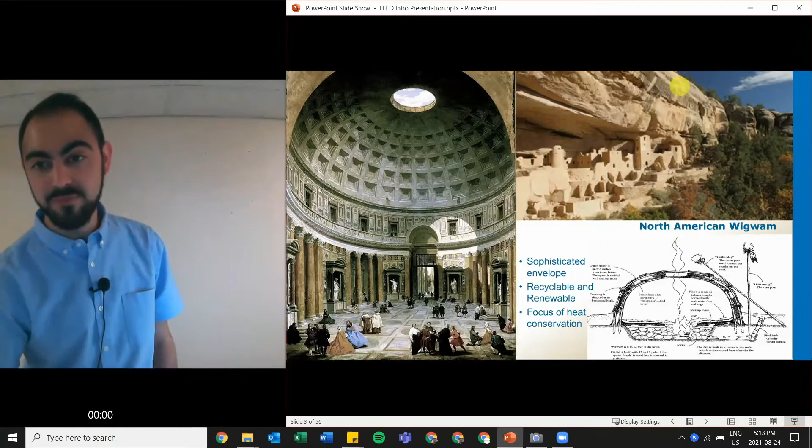So what I'm trying to get at here is, buildings aren't new - we've been building buildings for thousands of years. And if we could take some of the techniques we used to build, or variations of them, and incorporate them into our buildings today, we might be a lot more efficient than we knew we could be, just by using techniques that have worked in the past.

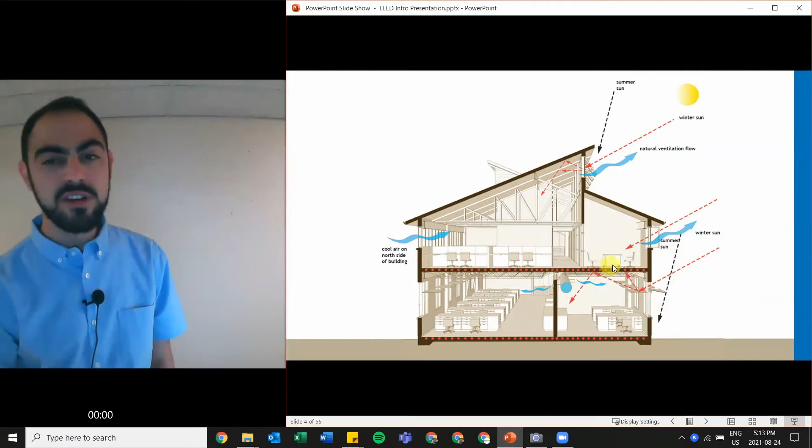And this is the modern way of looking at solar or passive heating and cooling - blocking the unwanted heat from the high-angled summer sun, but giving me free heat from the low-angled winter sun when we do want it, in our south-facing windows. So really, why are we here today?

I'm not going to explain too much about global warming and carbon emissions. We understand the connection - never have we had more carbon in our atmosphere than today, and that is a result of how we power our daily lives through fossil fuels. We know that carbon is able to trap extra heat in our atmosphere and increase our temperature by a little too much, and it's going to have a lot of effects, and it already has had some.

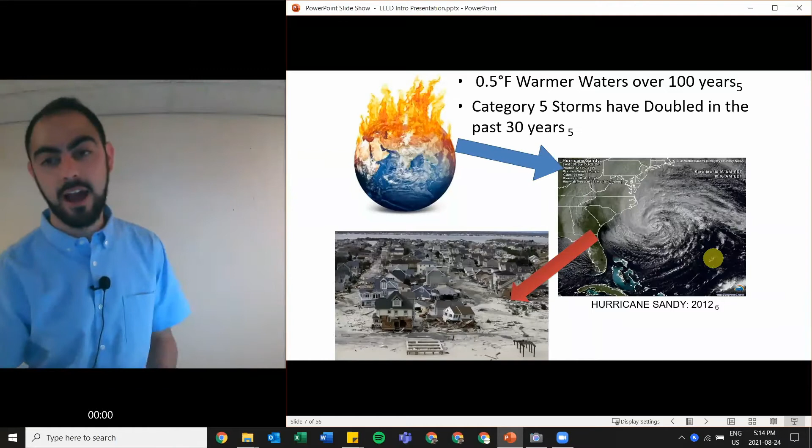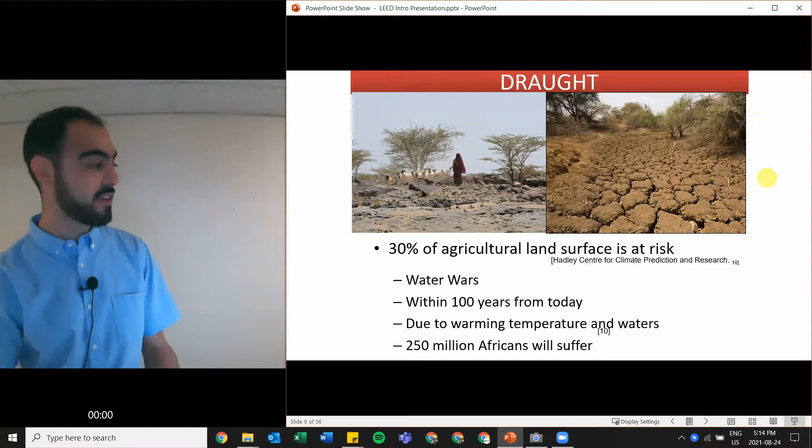We're looking at not only the air warming, but also our waters warming, and we're seeing more and more vicious hurricanes, which warm water is a breeding ground for. You can barely calculate how much damage, in terms of lives and money, things like this have caused. We're looking at unprecedented levels of drought throughout Africa, and now in North America - we saw that in the US, a lot of their lakes are below points that have ever been seen before - and just general pollution.

To be honest, if we don't make any big changes right now, we're going down the wrong path. And there's a lot of people out there that don't believe that science, and I say to them, okay fine, let me frame it in a different way. Right now, we're on Earth - it's the only planet we're living on.

There's a finite amount of resources on it, and we've been lucky enough that the Earth is willing to share them with us, but it simply doesn't make sense to use them at the rate we're using them. Whether you talk in a climate change sense or just common sense, it's not economical.

Our population is rising, and our demand for energy is only going up faster and faster. If we keep our consumption rate at this level, we're just not going to be able to afford our sources of energy. It's not efficient, and it's short-sighted - our consumption rate is too high for our energy resources, and we need to find alternatives that are less harmful as well.

So there's this word sustainability. It is the buzzword of the last decade, that's for sure. Everybody claims themselves to be sustainable, and this is one that actually is a direct sustainable profession, and I'm happy that you're interested in it.

Now, there's a lot of different definitions, but the one that I like to get you in a good frame of mind is the fact that we don't inherit our Earth from our ancestors, but we rather borrow it from our children. And that plays on the actual definition of using enough of Earth's resources to support ourselves without compromising future generations to support themselves. And that's what we're here about, mainly pertaining to buildings.

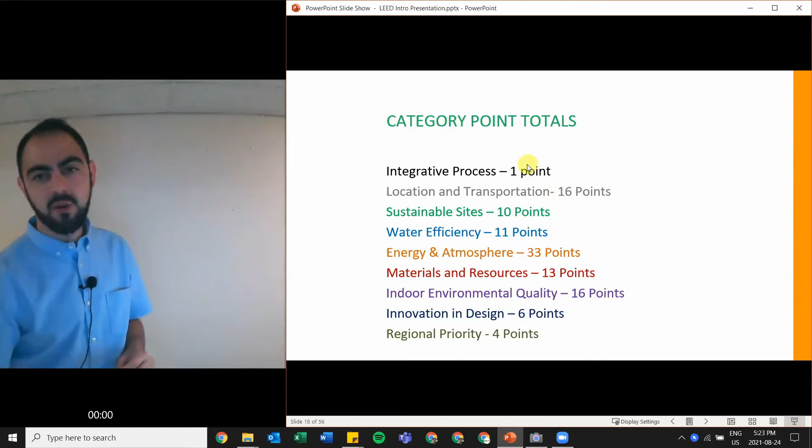This is a little scorecard that we go into detail in the course, just breaking down all the point totals per credit per category. Now, these are the categories, and we're going to just touch on them a little bit, but I just wanted to introduce you to them because eventually they will be somewhere in your brain. Here are all the categories tallying up to 110 points total.

Now, the reason why LEED has really been so successful, and you've probably heard about it before I brought it up or Ashton's brought it up to you, they've done a fantastic job showing developers and owners that going green doesn't have to mean cash money green. A lot of the times I've seen a LEED building not cost anything more, no premium over a conventionally designed building. However, usually it's about a 1 to 3 or 4% premium on the initial cost of a building. 1 to 4, that's nothing.

Well, on a $100 million building, 1 to 4 million bucks is still something to most people. And that has been a challenge on encouraging people to kind of make the jump into LEED. However, once they see the high return on the investment, it's a much easier sell.

And there's 2 different ways to return your investment. The indirect ways are marketability. So we look at a lot of universities, colleges, businesses like banks, only building, buying, and leasing out LEED certified space. Why? Well, looking in 2021 and on, sustainability in our decision makings as a customer has only become more important. And if our sustainable values align, maybe I'll come to college, university with you. Maybe I'll do business with you if our environmental values align. And that's the indirect way, increasing our corporate sustainable or social responsibility.

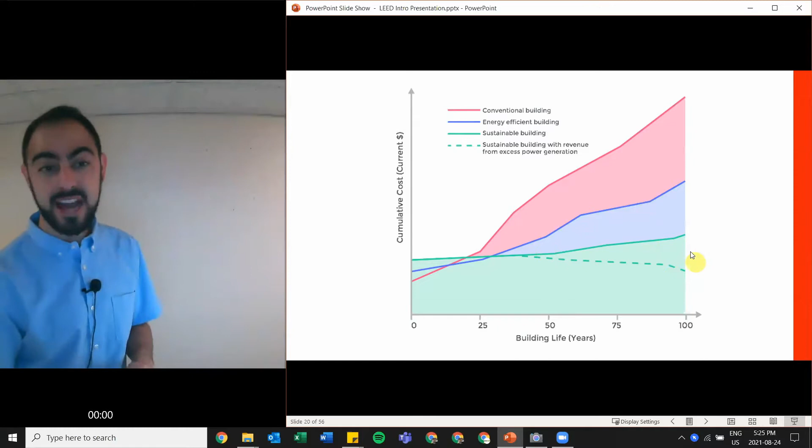The more direct and the real seller is this simplified chart. A red building at year 0 has the lowest cost, but over time we're using more energy, more water, more maintenance. It's not the best building, it's just built to code. Whereas a green building sure initially costs a little more, but over time we're less vulnerable to the fluctuations of energy, of water. Maybe we even have excess electricity from photovoltaics on our roof, and we can sell that electricity back to the grid and recoup even more of our investment.

And it's kind of the basis of sustainability. It's what we're trying to accomplish with LEED. We break the earth into these three big spheres: the profit economy, the people society, and the planet environment. And what I'm hoping our building is able to do is satisfy a lot of the wants and needs in each of these spheres through completing LEED credits to get a sustainable building in the middle.

And that side that we just touched on was the profit side with our high return on our initial investment. But what about the people? As I said, we're in these buildings all day, every day. And I mentioned we are demanding green buildings more and more. And frankly, if companies don't meet what the market's demanding, those companies aren't doing too hot going forward.

And that shift is taking place even to a generational extent. You look at grade school curriculums nowadays, they all have a component of sustainability. Earth Day, Earth Hour, who knew about those 40 years ago? Now they are embedded in our current culture.

And most important to us here today, it is a brand new job market. We've had the blue collar workers, we've had the white collar workers. Now there's this green collar industry. I wore my wrong shirt, I'm sorry. But it's here to stay. It's growing rapidly and it's good to get involved in now.

And honestly, LEED is one of the very few professional designations that opens a lot of doors that normally an unconventional background or student might not be able to access. LEED does a good job at bridging a lot of different industries together. And that's one thing I like most about LEED and sustainability. It is so multidisciplinary. If you do not know exactly what you want to do in your life, great, fantastic. That's wonderful because LEED and sustainability get you exposed to a lot of parts of the industry.

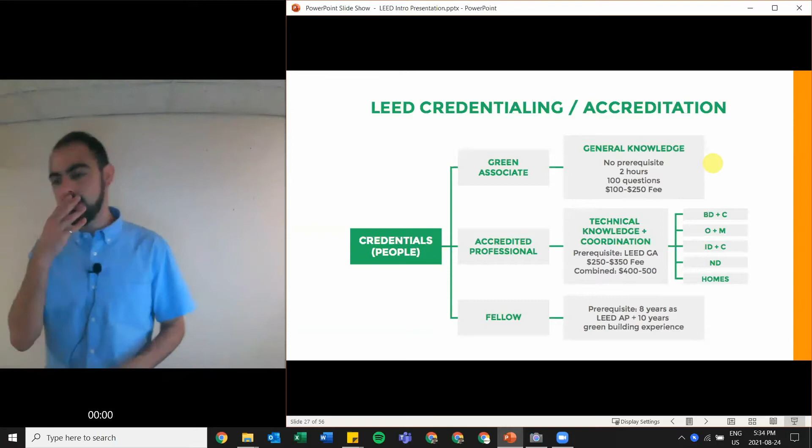That's what the LEED Green Associate really shows potential employers and clients. And it's not even just architects, engineers, manufacturers — even banks. I've taught, for example, JP Morgan's real estate analyst division. They want to know what goes into their buildings and investments to make them LEED certified. So it's really a diverse array of different people who find interest at the LEED Green Associate level.

It is a prerequisite, the Green Associate that is, to the Accredited Professional level 2. There are no prerequisites to the Green Associate, but you've got to pass the Green Associate before going on to the AP. There are different specialties in the AP, which we'll talk about, but quickly — I, for example, am Building Design and Construction for new buildings, and O+M for Operations and Maintenance for existing building retrofits. Those were the 2 paths I chose to specialize in.

However, most of my past students often just stop at the Green Associate — sometimes it's enough for them. It's really totally up to you. They can never do harm, as I see it. You're going to use them sooner or later for your own benefit, but they're definitely never going to hinder you.

The Fellow is just an honorary designation — if you've been in the industry for 10 years, you can get nominated for it. Now, who actually made LEED up?

The US Green Building Council, over 20 years ago, invented LEED and they're still the ones that run the show. They created the rating system, which is how we rate what makes a green building actually green. They also produce our reference guides, which are 800 wonderful pages, the Bible of LEED, telling you one step at a time how to build a LEED building.

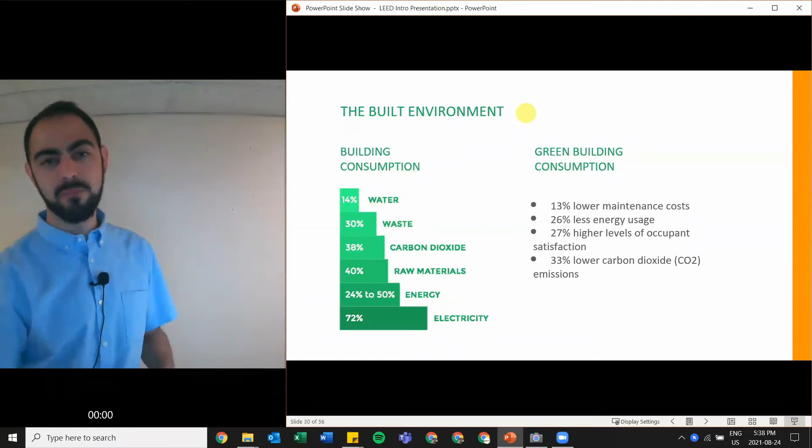And that is a huge part of LEED: how can we make buildings reduce their impact on the people and the planet? LEED was smart. They said, why should we reinvent the wheel? There's tons of good tools and standards out there that are much smaller of a scale, but they work and they're often underused. Here's an example of one that's heavily embedded in LEED called the Lifecycle Assessment, which I'm sure y'all have heard of.

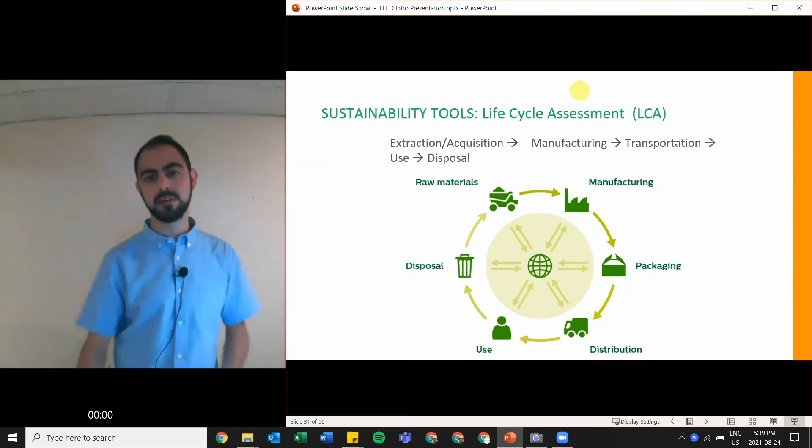Don't just look at one stage of the product or project, you've got to look at its entire life. How did we extract it, manufacture it, transport it, and where does it go at end of life? This gives us a much more realistic perspective on selecting and comparing products and buildings. And LEED uses them a lot.

Now, we talked about the plaque on the wall. How does that plaque get there? The first step to getting LEED certified is called registration, and that means you've done nothing. It just means you're thinking about it, and that is a good first step, though you've got to be thinking about it if you're going to get certified.

The person who registers the project is then deemed the project administrator, and that's usually somebody like me, usually a LEED or sustainability consulting firm. Just Google this and no matter where you are, you'll see pages of results. There's a lot of developers and owners that want to go for LEED and are only building LEED or better, and they need sustainability consultants to help them do the correct documentation and the right strategies to get there. So it's a really big business now.

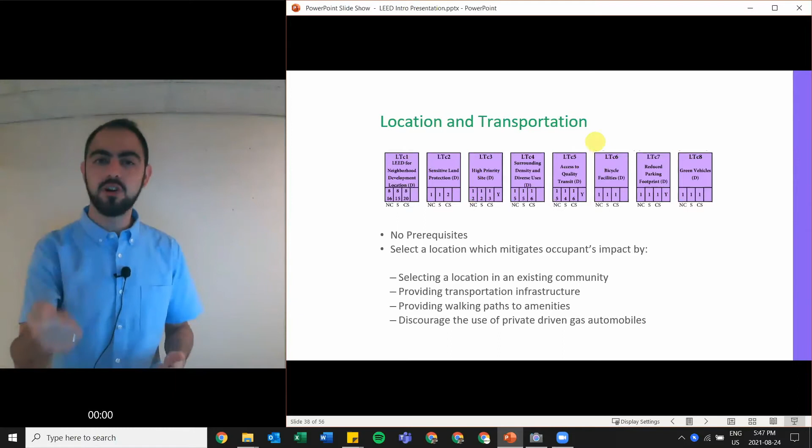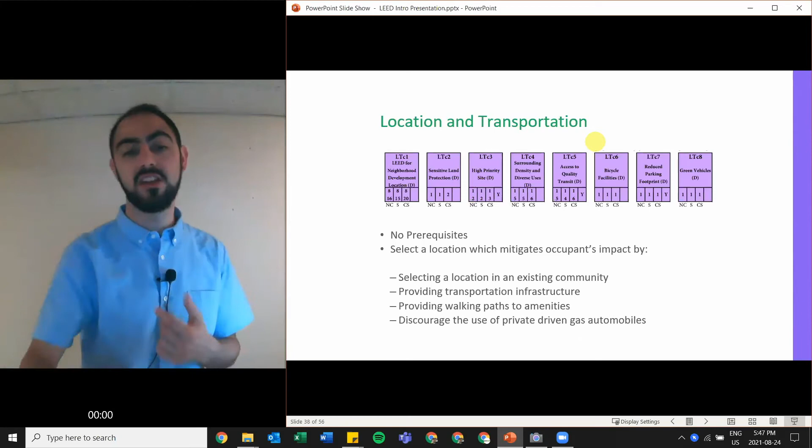There's two parts to this one. One is the location of the project - are you building on sensitive land, or in the middle of nowhere, or in a dense area connected to people, amenities, and transportation systems? We look at 4 different credits to discourage people from driving alone in a gas guzzler to our building, by encouraging public transit, locating close to it, biking, carpooling, and alternative green vehicles. That's location and transportation.

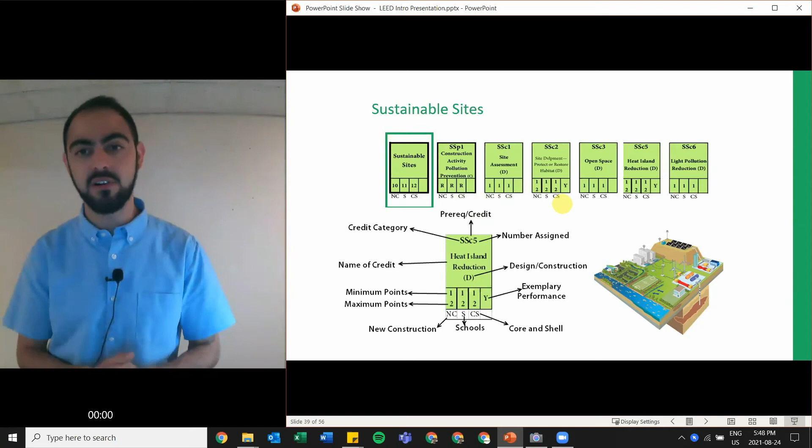Sustainable sites more so focuses on what you do to the site itself - do you protect it, restore it, or make things worse? Here we have a prerequisite that tells us to control our pollution during construction. Then we have credits worth points for increasing vegetation on the site and open space, reducing the heat island effect by using less hardscape like dark asphalt surfaces, reducing rainwater runoff from our site and maybe even collecting it for later use, as well as reducing light pollution.

Water efficiency is our next one, and this is a lot simpler to manage. There are 3 prerequisites which each have a corresponding credit. The first one we look at is outdoor water use reduction. The intent of the entire category is the same: use less potable water in and around the buildings. Potable water is just water we've treated that we can drink, so don't waste it in our toilets or for irrigation - use it and save it for what we need it for. So we have a prerequisite and a credit for reducing outdoor water usage, maybe using drip irrigation or recycled rainwater.

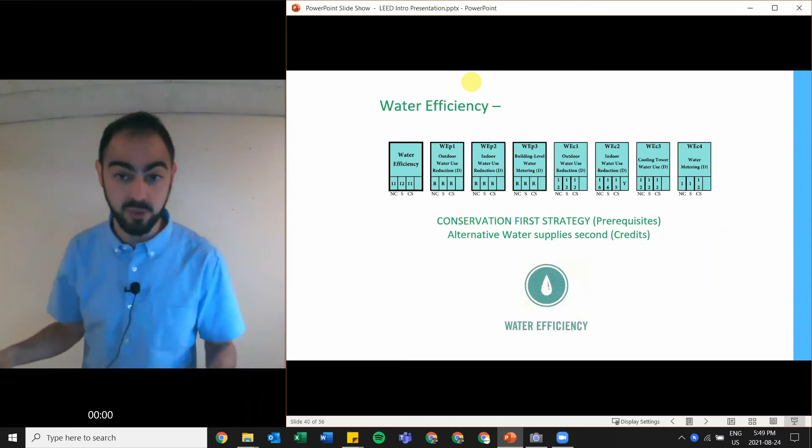For indoor water use, we're looking at low flow faucets, dual flush toilets, even composting toilets - an interesting strategy I've seen work before. And then we have a prerequisite for building level water metering, to early detect leaks and save things before they get out of hand.

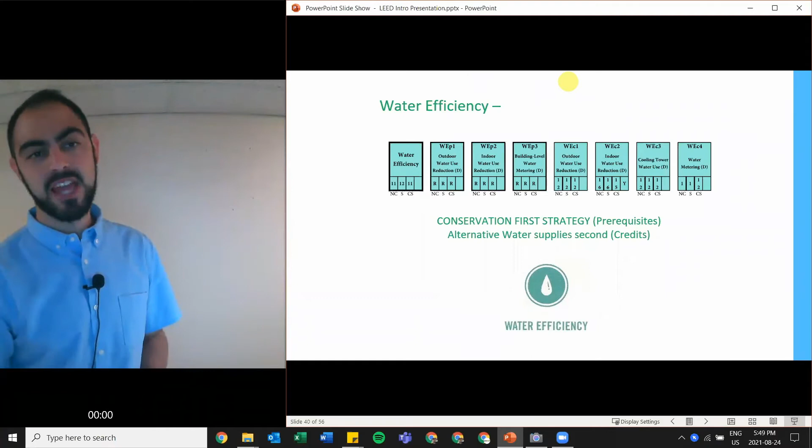It makes sense, to be honest. There's a ton of energy resources here, and relatively, our energy prices are low in Canada, even if it doesn't feel that way when you get your electricity bill. It also gets really cold here and really hot here, and most people, thankfully, have access to energy sources. So those 3 things combined - lots of resources, low cost energy, and extreme demand from cold winters and hot summers with everyone having access - means we're not afraid to use it. We use a lot of energy to meet our demands.

Oh, here's a big PV area I worked on a long time ago before I started traveling and teaching, and now I look like this.

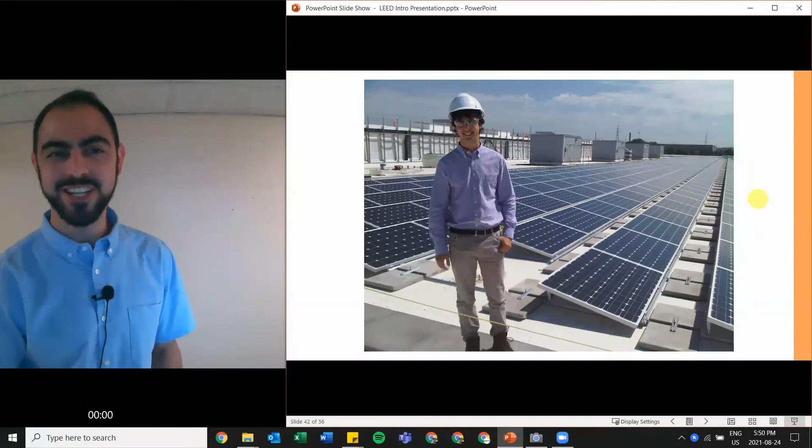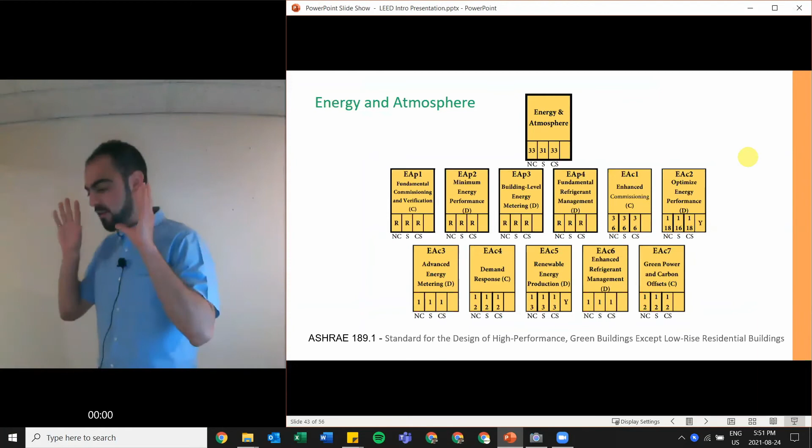Thank you very much. Energy and atmosphere is the one we just mentioned. This category talks about commissioning: having a third-party person with experience in these expensive, unique, high-efficiency building systems, from HVAC to lighting, come and oversee and ensure they actually work the way we're paying them to work.

Then we're going to talk a lot about energy modeling. This is a huge part of LEED and a huge part of industry today. More and more cities like Toronto and Vancouver are mandating an energy model if you want a building permit for a larger structure — I think 10,000 square feet in Toronto. So the idea is trying to model a building. I'll show you an example in a second, so hold that thought.

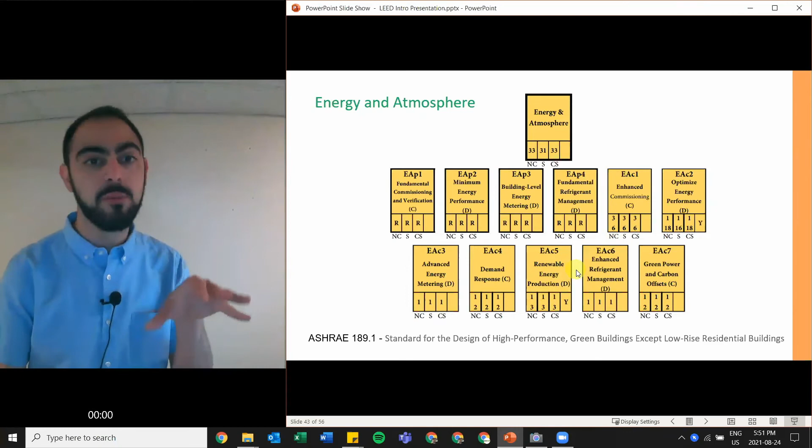We also have energy metering, and refrigerant management to try to reduce the amount of chlorofluorocarbons and save our ozone layer. And then we also encourage on-site and off-site renewable energy generation.

This is just an example of a model I did a really long time ago now, holy smokes — this is a building in Toronto. Essentially what you do is build the model inside software. There are a lot of softwares out there — eQuest, IES, EE4. There are so many different ones and they all do the same thing.

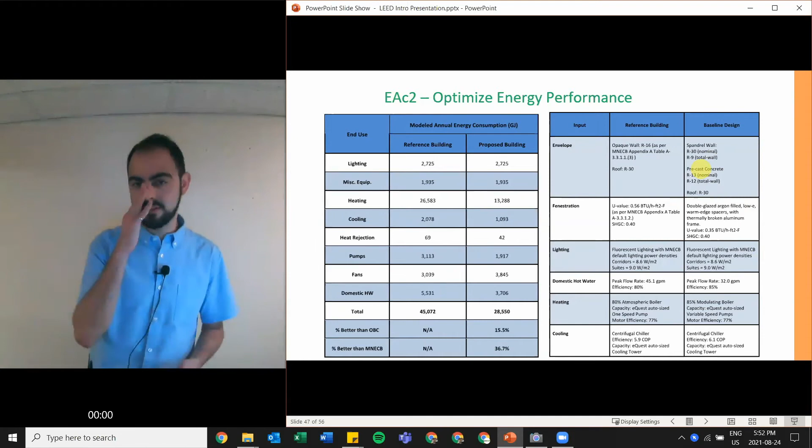How are we going to know what different design strategies will affect the overall energy usage of the building without having to build it first and just see? Energy models are a way to do it. We build a simulation of our different designs and compare it to a baseline to see how much better we are than it. This is a huge industry now, separate from LEED as well, because not all LEED buildings need it, and not all buildings that need LEED need an energy model — but soon enough they will require one, and that's why this is such a big industry now.

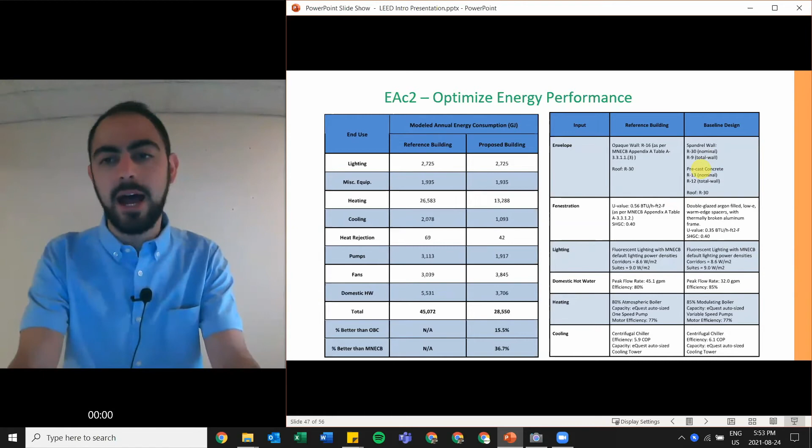This is one I did in eQuest years ago, as I mentioned. You can see how much emphasis LEED puts on energy efficiency — up to 19 points in this one credit, when you only needed 40 for certified. This is where we're going to save the most money and reduce the most greenhouse gas emissions, which is why it's so heavily rewarded here.

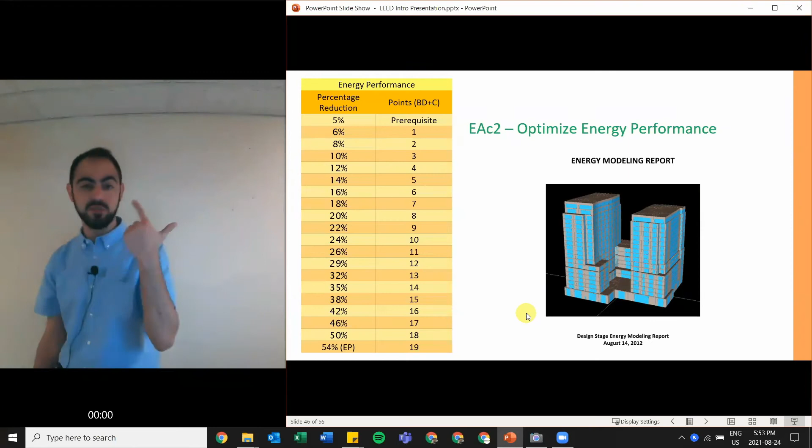We look at materials and resources, focused on where our demolition debris goes, what kind of manufacturing facilities our products are made in, what kind of wood we're using, and whether it was sustainably sourced. That's materials and resources.

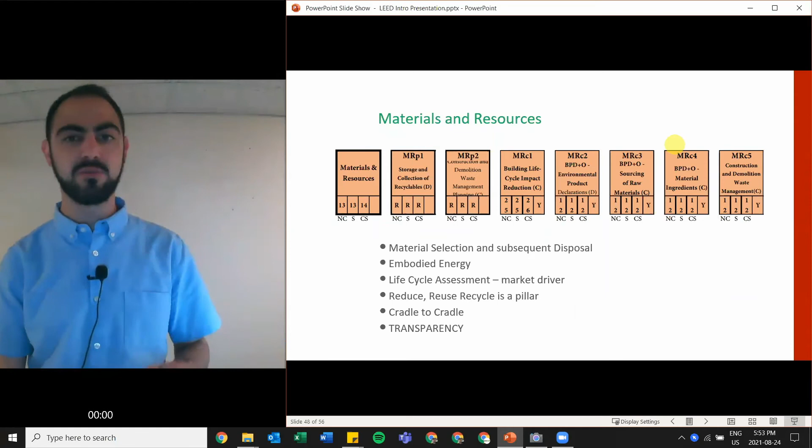This one has been talked about a lot since the start of the pandemic: indoor environmental quality, having a lot more fresh air, which is what LEED has always really harped on, and having less chemicals inside, from things like VOCs — volatile organic compounds in paints, adhesives, and other toxins.

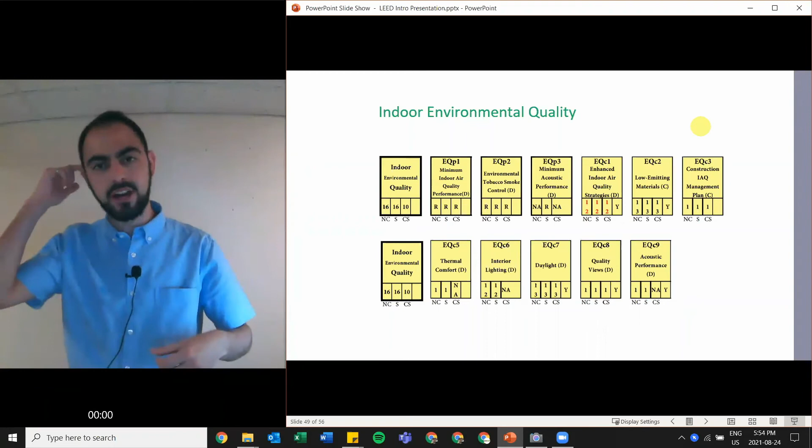In this category, we also look at how much lighting control we have, how much control over temperature, how much daylight we have, how many views we can connect to the outside, and how the acoustics are — am I listening to everybody yell, or can I hear myself think? That's indoor environmental quality.

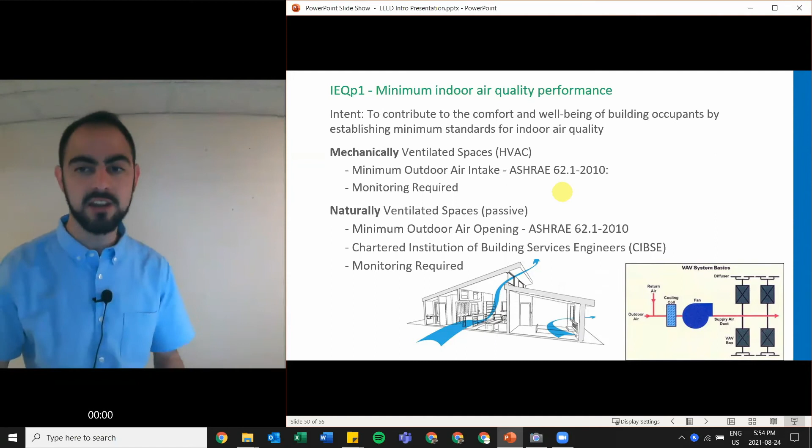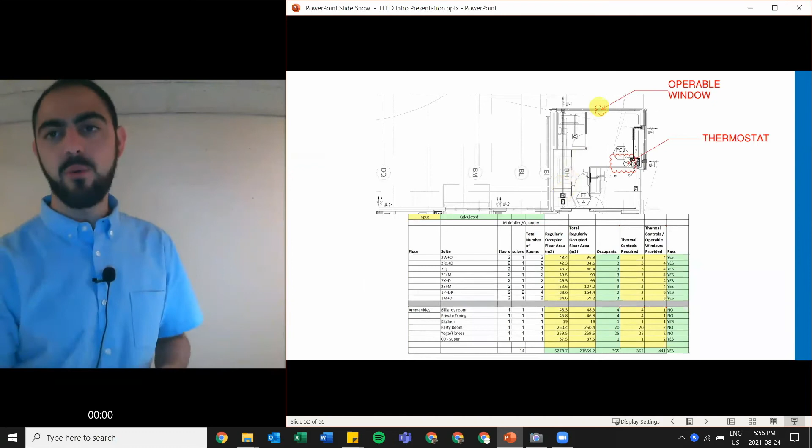Here we see an example of our prerequisite, following something called ASHRAE, a very important standard from a society that puts out a lot of standards that LEED piggybacks off of. LEED doesn't like reinventing the wheel — they like to incorporate proven strategies into this overarching building rating system. This is just an example showing our thermostats and some of the documentation required when we submit.

Our last 10 points are these bonus categories, where we have an option for innovative performance — if you're doing something on your building that's good for the environment, economy, or society, you can create your own credit. Simple as that. If it's not in the current LEED rating system, you can often create your own credit for an extra point.

Exemplary performance is for doing more than a credit asks, like being 55% more energy efficient. Then we have testing a pilot credit out, or finally a LEED AP — so little old me, I'm worth points if I'm working on that LEED project. Usually there's a LEED consultant if the project's going for LEED, and they're the LEED AP.